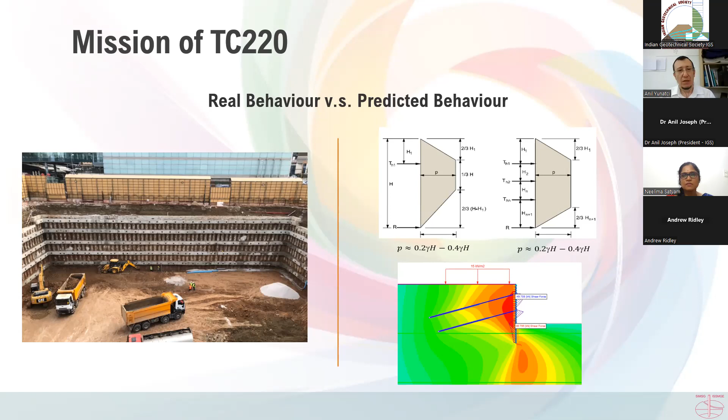The basic issue is that what we assume initially is not always reflecting what is happening in the field. Take the example of a deep excavation project and try to have an idea of the possible failure modes of an anchored pile wall. The real behavior versus predicted behavior, and the possible modes of failure, should be clearly foreseen and considered in your stability calculations during your conceptual design or finalized design.

However, we have a range of diverse uncertainties which arise from uncertainty due to mechanical characterization of materials. This may not be the correct expression, but I think it simply expresses its purpose. The uncertainty due to mechanical characterization may arise from spatial coverage, strength characterization, constitutive behavior, or any other type of both aleatory variability and epistemic uncertainty while characterizing the phenomenon.

There is also uncertainty and change in external and internal loads, such as pore pressures—you may consider pore pressures as internal or external depending on how you characterize and define them—as well as external loads. There are uncertainties due to the performance and mobilized capacities of man-made support elements. What we basically define in our good-looking finite element analysis in terms of the pre-stress value of a tendon may not always work out, or almost never works out, in the way we considered initially.

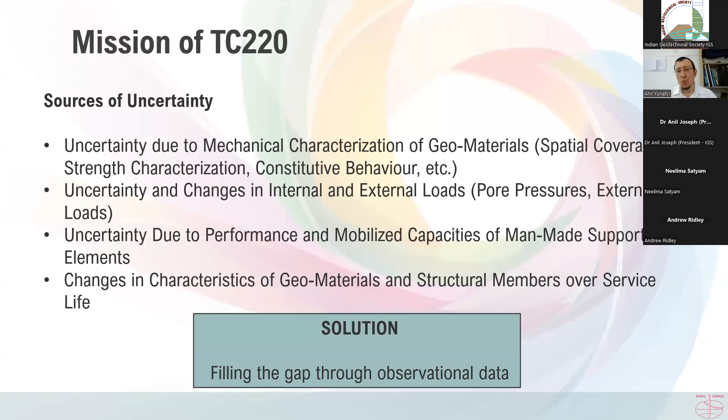There will be changes in characteristics of geomaterials and structural members over service life due to deterioration of the structural elements and their interaction with the natural materials, as well as long-term possible changes in the characteristics of the geomaterials themselves. So the solution will be to find an engineering way to fill the gap through observational data.

Continuing to the objectives, you may reach the committee through its dedicated website, through the ISSMGE main site—Andrew will spend more time discussing these, so I'll skip them quickly—or you may simply log on to field-monitoring.org to learn more and see how you can contribute.

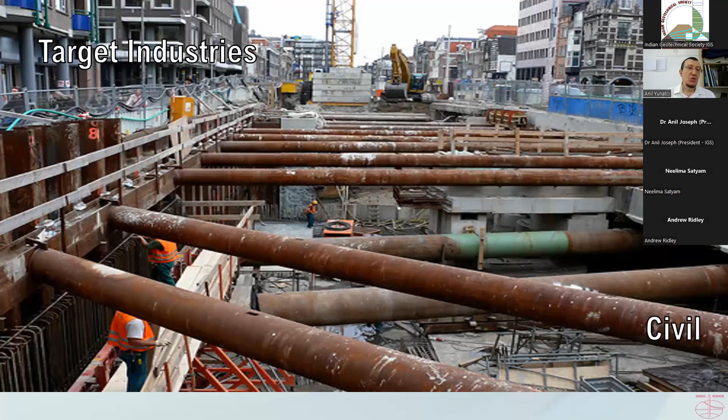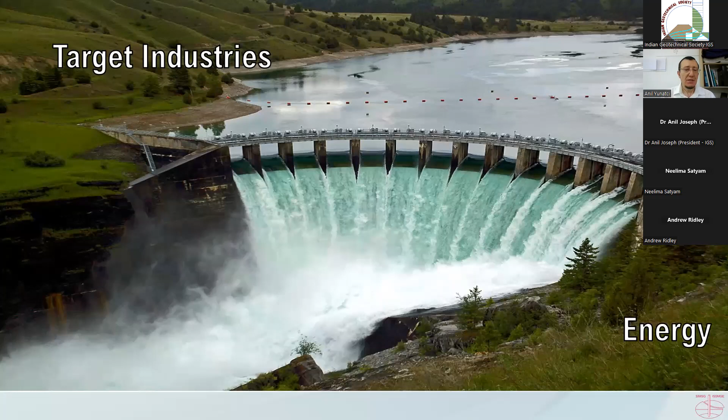We are trying to cover the civil industry, the mining industry, define or monitor geological hazards such as rockfalls and toppling failures, work in the energy sector and renewable sector, and keep an eye on existing infrastructure as well as newly built infrastructure, both across different time spans.

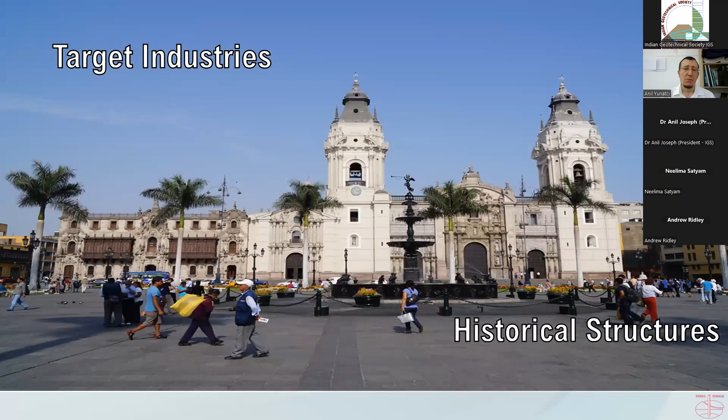What I mean by time span is that we may monitor a structure while it has been undergoing the first construction stage, or during its service life. This also applies to historical structures with a similar approach, industrial structures, and many others I may have skipped to emphasize here.

A very brief note on upcoming events and activities: instrumentation monitoring will be discussed in early October in Salzburg, Austria. There will be a specific session reserved for instrumentation monitoring at the ISRM Congress. The BGA, British Geotechnical Association, has announced a seminar, a half-day meeting at the Institution of Civil Engineers. Here you can note down the access link for more information.

Next year in Barcelona, and similarly at the 18th European Conference on Soil Mechanics and Geotechnical Engineering, taking place in Lisbon, Portugal, we'll be discussing more and having dedicated sessions on instrumentation and monitoring and how we can make it progress better. And last but not least, one other fixed event already mentioned: the largest dedicated event, the International Symposium on Field Monitoring in Geomechanics, will be held in India in 2026.

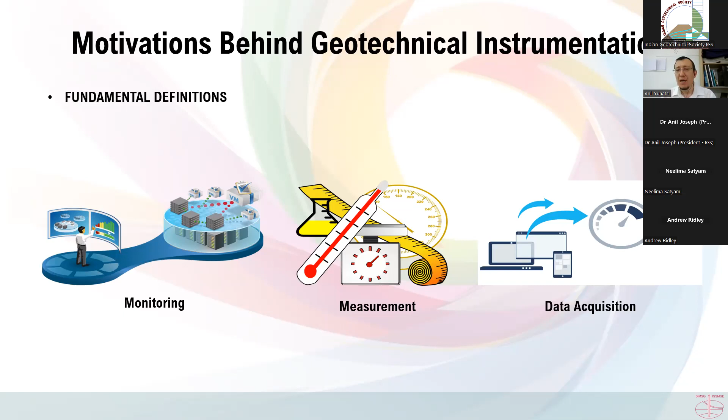And that's where the concept of monitoring comes in. Monitoring basically covers, in my sense, all the aspects of it, plus the data interpretation, and telling people in the most basic sense what is happening to my structure, what has happened to my structure, and what is likely to happen to my structure. The last question is not always easily answered.

The motivation behind geotechnical instrumentation is the performance assessment of new or existing geostructures. In the most basic sense, we need to define their potential failure modes. We need to verify if they are performing okay with regard to the assumptions we made before the construction stage. It's not only the sole structure we're trying to build or monitor, but there are adjacent structures or assets potentially affected by the behavior of our structure. So it's not just us - let's not be selfish in this sense, because any consequence will directly affect what happens to the nearby structure.

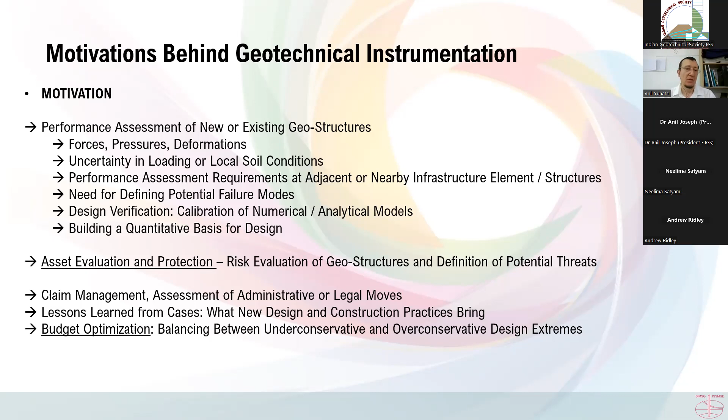So the motivation is to bring a working framework, which undoubtedly has to be customized specifically for each project we're involved in, to optimize the solutions for all parties involved, both in the technical sense, financial sense, and legal sense, due to its possible consequences. In terms of budget optimization, balancing between under-conservative and over-conservative design extremes is just one of the advantages of why you should monitor a structure.

Frequently encountered misinterpretations from our daily basic experience - we have heard directly from stakeholders that instrumentation is unnecessary, the structure is safe, instrumentation is expensive, it's hard to apply instrumentation programs, it's obstructing and decelerating my construction program, and data acquired from instrumentation programs cannot be used efficiently. These are all strictly and completely - I have to express it very freely - misinterpretations.

If you analyze the structure and the phenomenon in the correct way, and propose good, efficient solutions, then instrumentation will be essentially helpful in both monitoring the performance of your structure and preventing any legal obstructions or conflicts.

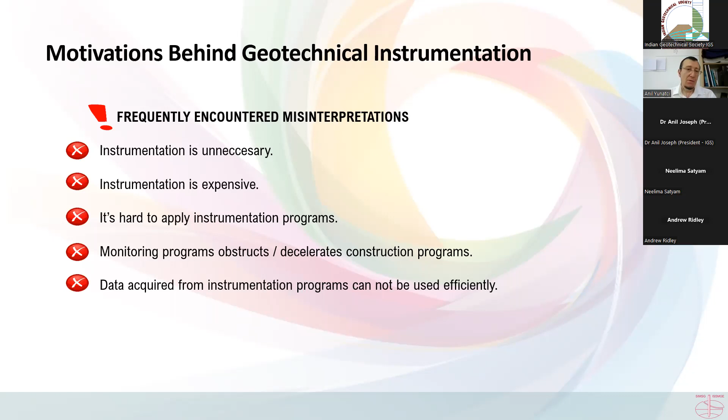I had a chance to go through my notes during the panel I attended about 3 or 3.5 months ago in Rome. It was the 9th of the series of the International Course for Geotechnical and Structural Monitoring. And these are not my words directly - these are jotted down words from the speakers of the panel, who are individually very experienced in their fields and have decades of experience, both in manufacturing instrumentation monitoring products, deploying them, managing large volume projects with a lot of instrumentation involved, and taking care of the financial side of it.

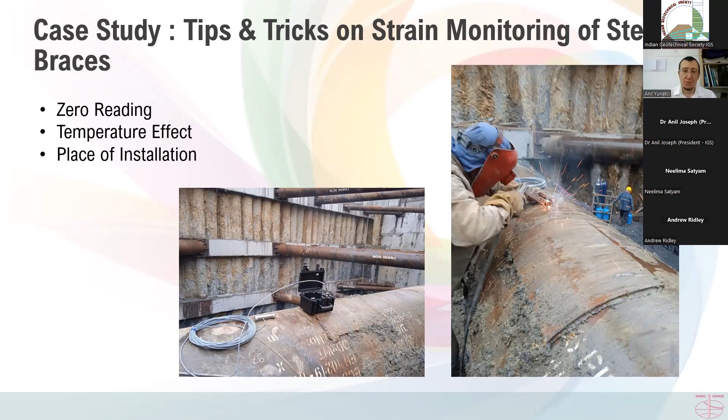Just speaking of the zero reading, you have several options. You can just install your strain gauges at rest state, where they are lying on the ground with no bending stresses and no lateral restraints. So if they are just properly supported uniformly and they will not be restrained at both ends, then what you have is a sort of zero reading over there.

So any strains on the zero reading will be just driven by the temperature changes, even if they are not restrained at both ends. So this is what happens when it's lying on the field waiting to be installed. And the second stage, now you just put it in the place where it should be. However, just do not make the connection.

So it's somehow without the connections and the restraint, operating in a way that it is not fixed yet. However, the members are in the effect of their own self-weights. So you will have a different zero reading over there. What you're comparing should not be pears and apples.

So be careful on when you're installing it and when you are reading your intermediate measurements. It will be very useful if you do both and try to compare, and that will help you explain what is happening in the field. Only the bending stresses are due to the self-weight of the structure. Here again, I'm not talking about any temperature changes. And I have not made any excavations yet. I have just placed the struts.

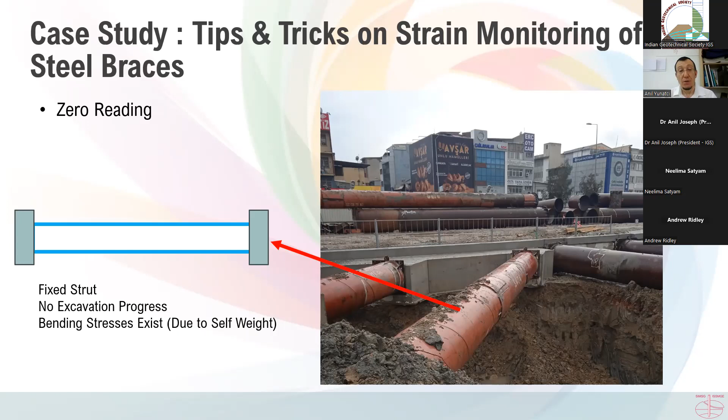Then I fix the ends of the struts, maybe include a load cell in between the reinforcement support and the elements, so that I can do a benchmarking by measuring the loads directly or try to infer the loads on the struts by directly measuring the strains. So this is what happens if they are put into temperature effects when they are fixed.

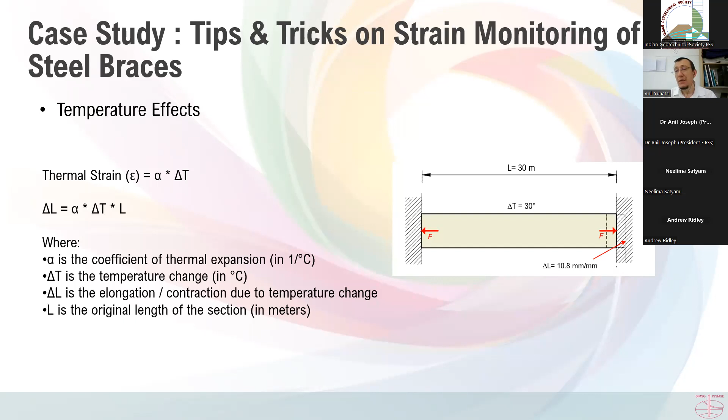So the equation is basic, and let's do an extreme calculation. It's a 30-meter long hypothetical element, as I've showed, and we are living in an extreme environment where the daytime temperatures are highly fluctuating and the change in temperature reaches up to 30 degrees Celsius. Let's see what happens hypothetically and how it is reflected into your readings.

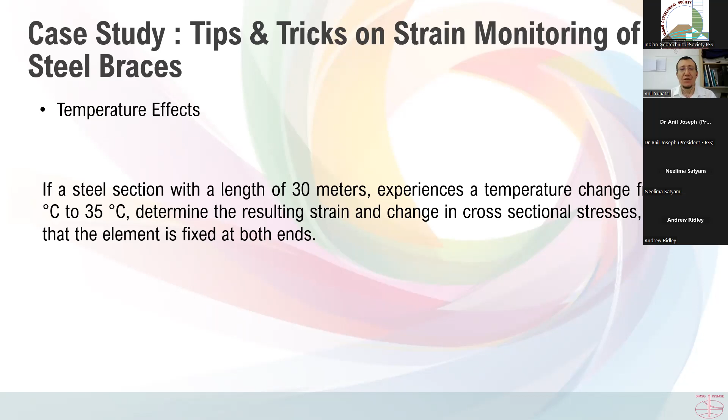So my scenario is the temperature changes from 5 degrees Celsius to 35 degrees Celsius. I have not made any progress in the excavation. Let's see what happens. There are forces induced and the stresses. We do the basic calculation, select the generic strut cross-section, and we are calculating that we are experiencing about 110 tons of thermally induced extra stresses on the structural members just due to temperature fluctuation.

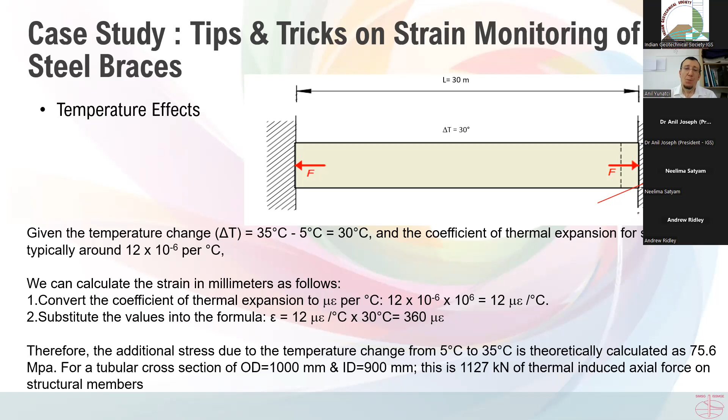We do not normally see this in our numerical analysis because we do not conduct numerical analysis on the basis of these temperature effects. A lot of case histories are showcased in the literature. One of them is taken from Osborne et al. 2023, that's access date. Here you can see that over a temperature change of almost 10 degrees, the strut loads on average in 3 different strut levels go from 1400 kilonewtons to 1800 kilonewtons.

So imagine that you are not taking continuous data from your strain gauge readings. Here locally, we don't do that. We recommend that. We do not always succeed in that. It's just some temporal readings taken at each excavation interval or weekly, which is mostly requested, and we object to this. And what happens if you don't carry on a proper practice of frequent sampling, also capturing the temperature change, is that you cannot differentiate any effects of load change due to temperature versus the excavation stages.

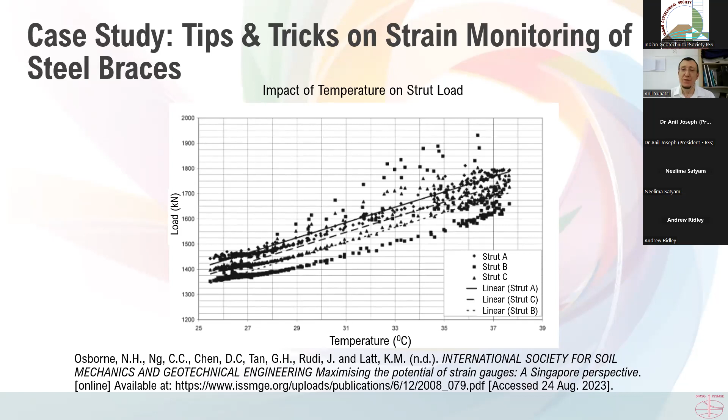You may have the sensor installed right, but if you haven't set up the monitoring program accordingly in the appropriate way, then what happens is that you miss those data and you are faced with questions that the strain gauges are working in an erroneous way and you are not measuring what you should be expecting.

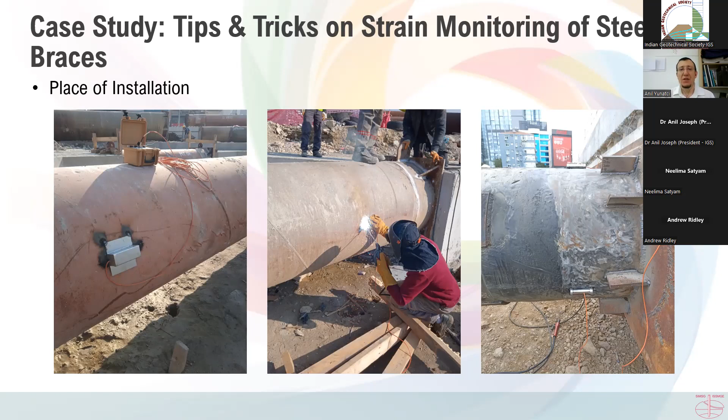So place of installation, whether directly along the supported sections or along the mid-span or the quarter span, is another discussion. As you all know, you may have some load or strain concentrations, non-uniform concentrations along these members. So keep an eye on where you are installing and the potential effects of installation.

The number of strain gauges fitted along each cross-section: if you use a double, hopefully if you place it in the up and down direction, then you will get the effect of the axial plus bending, because the bending will be due to the self-weight of the object and any changes onto that. If you are installing them facing each other along the hopefully neutral axis, then hopefully you will be experiencing only the axial effects.

If you use more, 3 or 4 strain gauges, then you have the luxury of eliminating any eccentricity related effects and see what is going on. So how you design the monitoring project and the details really matters, and the quality of the data you get. Of course, it increases the volume of the data to be processed. However, it gives you a very good knowledge at the end if you interpret it correctly.

Some of the time, we're faced with some difficulties as practitioners, like being faced with a bill of quantities in some procurement stages where not sufficient information is provided. I am sure that some of you are also experiencing those issues, and this can only be overcome by disseminating the knowledge and experience and bringing all people together in a common sense.

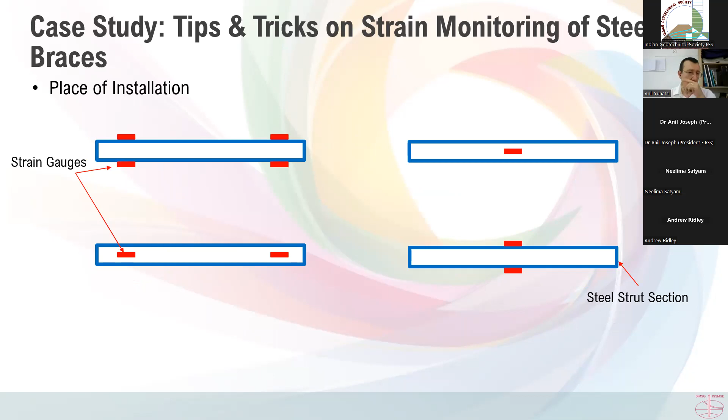So before installing the main foundation, which was very sensitive to settlements, we proposed to do a full-scale load test. So instrumentation and monitoring for the purpose of quality assurance and design verification, with the most basic set of equipment and methodologies with which we can provide some useful data to check our assumptions and numerical models.

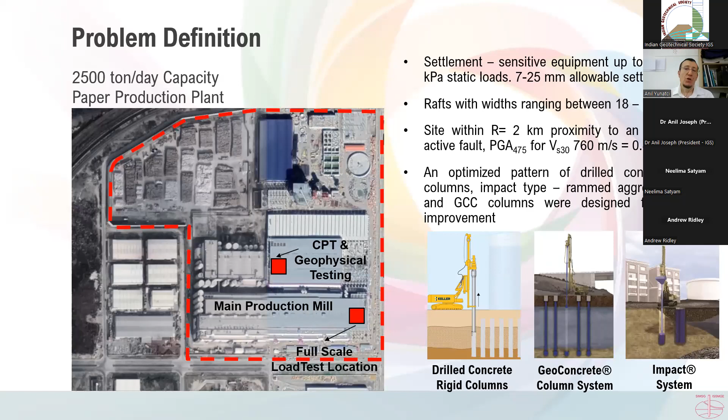The sensitive equipment was considered to carry loads ranging between 150 to 300 kilopascals, and the raft was ranging from 18 to 165 meters. So it's such a big plant. It was located in a very seismic area, and a combined pattern of drilled concrete rigid columns, impact type rammed aggregate piers, and GCC columns were designed for ground improvement. We did some CPT tests, some borehole logging, and tried to characterize the site.

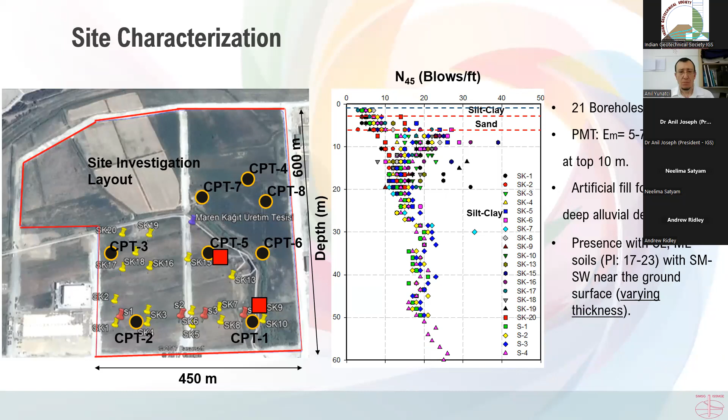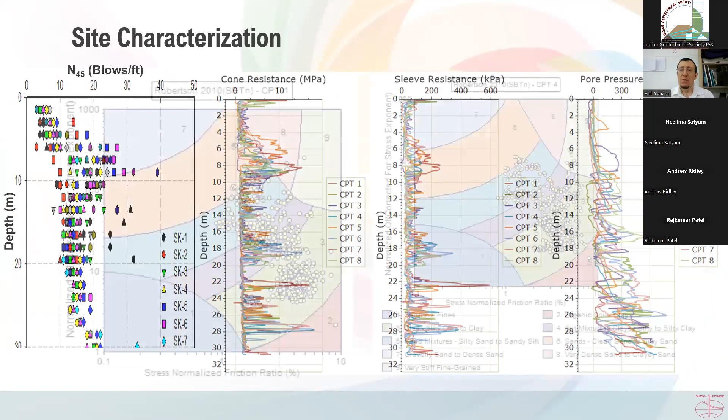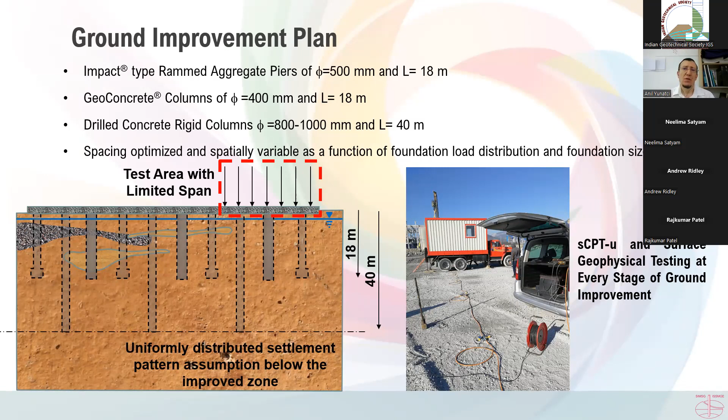I'm passing these quickly just to give you an indication that the site was properly characterized in any sense possible. And there was a very neatly planned series of instrumentation plus quality assurance during the intermediate stages of ground improvement. So after each stage, we still did some CPTs and seismic CPTs, as well as surface geophysical measurements, to see the effect of the ground improvement process on the realized values before making a full-scale load test.

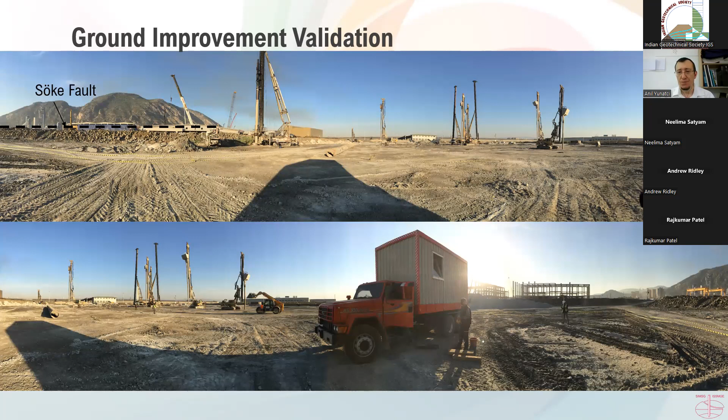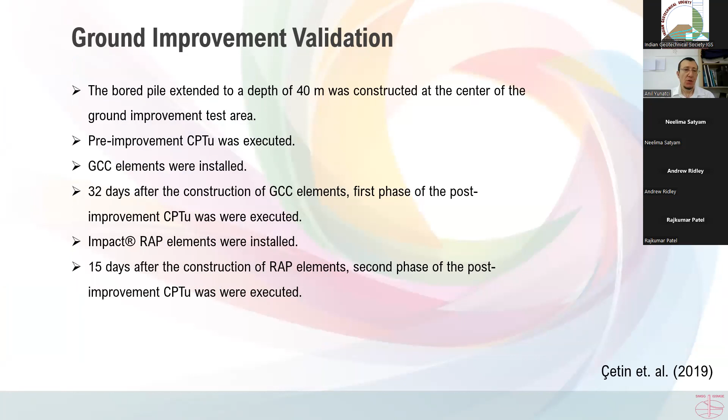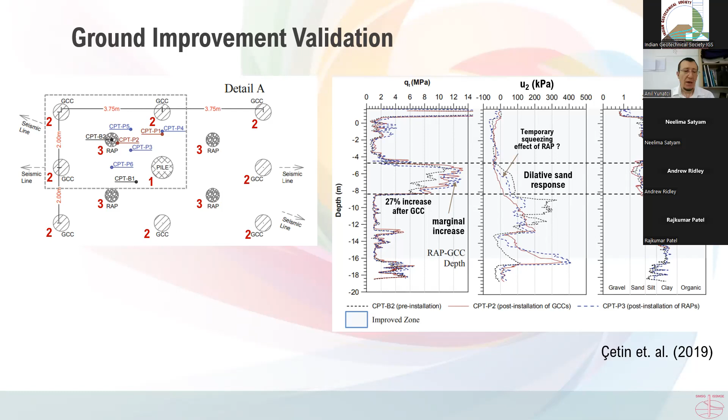A few glimpses from the field, from the nearby fault located 2 kilometers away, which is capable of generating large magnitude earthquakes, and the construction site. Surface geophysical measurements. A sequence plan of the instrumentation during the successive stages of ground improvement. Then we came up with a series of recommendations and verification through instrumental data on whether the desired performance was achieved. We did not stop there.

We were aware that the actual loading was to take place on a very large area. So by ignoring the size effects up to a certain extent, we decided to make a full-scale loading on a limited area. The design load was selected as 191 kilopascals, and dead loads were applied over 3 by 3 meters. So we applied concrete blocks as dead loads reaching up to 170 tons.

And we set up an instrumentation system to see if there were any consolidation settlements, which means whether the ground improvement stages were completed successfully, whether the elastic settlements were the only source of settlements we would encounter, and whether they were within the tolerable limits for the performance of the structure.

So the site was monitored remotely, in real time, by a very simple set of instruments through a real-time monitoring system. And we saw that the system worked seamlessly for a period of 1 month, and 90% of the total settlement was completed within 36 hours of completion of the design basis load. So it was almost all elastic settlements. This was validated.

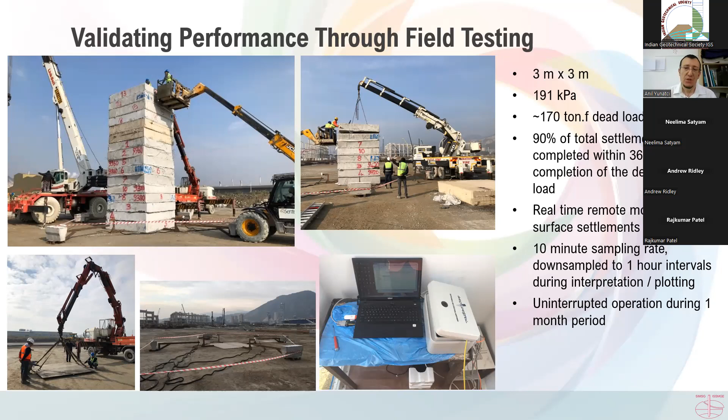Then the amount of settlements were used to back calculate this very simplified numerical model of the foundation to be resided there. Then we updated our estimations of the subgrade moduli, both in the static sense and the dynamic sense, because there was going to be working dynamic machinery, vibrating machinery inside an industrial site, to come up with updated estimations of some geotechnical parameters, which were then handed to the design engineer for conducting an iterative approach on the foundation performance assessment.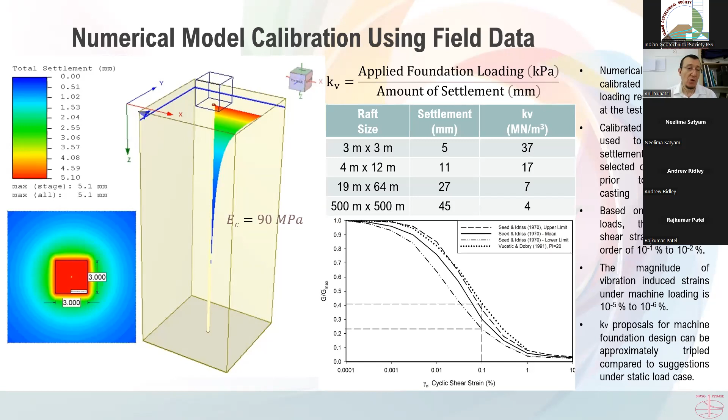So the thing is, as simple as it gets, we had a chance to play with multiple parameters, but this was one of the most simple cases we had. For some other problems, we have multiple parameters which are sensitive to the output, and they are nonlinearly related to each other, which means that we have countless options to back calibrate our numerical models. So it's somehow becoming an art to back calibrate a model using field observational data, and it has always been like this.

So the lessons learned from case study 2: detailed site characterization during preliminary design phase, direct assessment of design inputs for machine foundation design were put into action. And we considered that we made a small contribution to overall risk management during the lifetime of the facility due to geotechnical performance related issues, because the next stage for the investor was to decide, along with the third-party investors, of course, the insurance rates for the industrial site. That's where instrumentation monitoring was mainly put into action.

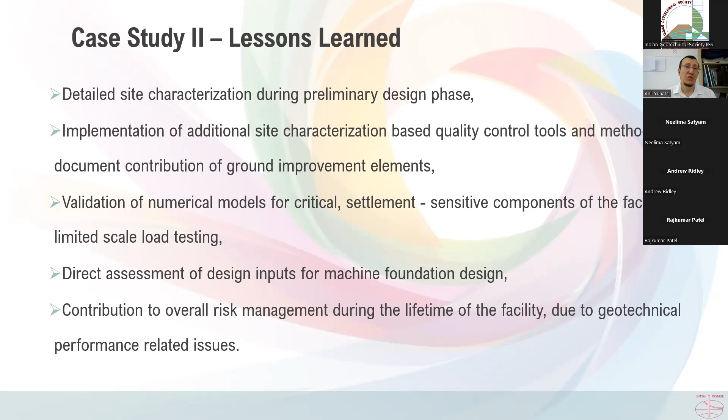So moving on to case study 3, don't worry, we don't have much. We're about to wrap up. So it's about long-term monitoring of a site undergoing slope displacements, and another 3B case, which is about test fill monitoring. My comments and conclusions will be similar. That's why I intentionally selected to include these cases under one case study.

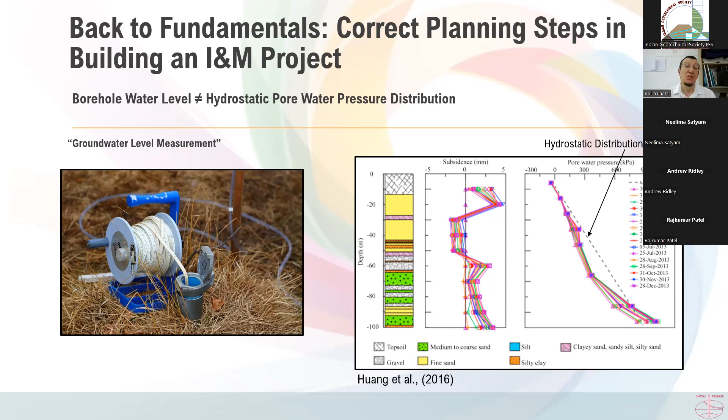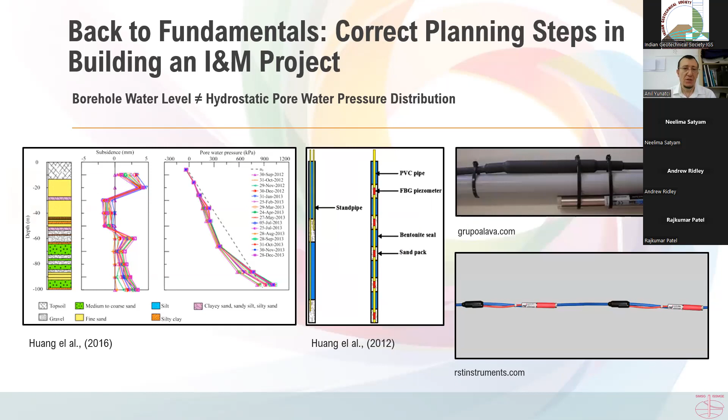So just a quick reminder, as almost all of you are experts here: for groundwater level measurements, we have to define what we are measuring. Borehole water level is not always equivalent to hydrostatic pore water pressure distribution. That's why during the rest of the presentation we're talking not about borehole water levels in general, but the piezometric levels. Numerous ways and technologies and tools to measure them. Multiple tools, vibrating wire instruments, fully grouted installation methods, Casagrande standpipe piezometers installed at different elevations. So I'm not concentrating on the tools we have, but the output and the essence of the story.

One parenthesis to be opened here. I really like this reference and work and like to refer to it in any case I can. I know that this is a big project and I have just quoted the reference. If you're interested, you may have a further read here.

The astonishing thing for me here is that, since this is an urban excavation where any adverse consequence would affect all stakeholders nearby, the project owner had to begin its instrumentation program 1 year before the excavation began, to have an idea of the fluctuation of the piezometric levels nearby, have an estimation of how the pore pressures would be distributed behind their excavation, and update their numerical modeling efforts

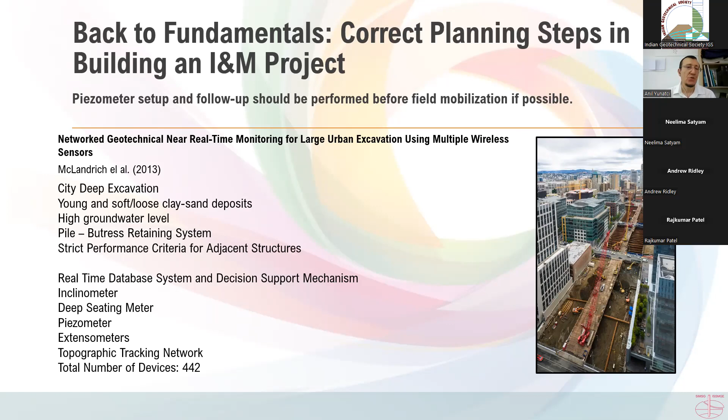in a similar sense. This would also provide them invaluable data in terms of capturing the fluctuation of that parameter within a year due to seasonal changes or rainfalls, so that they would have the luxury of differentiating how much of the fluctuation experienced during the construction stage was due to the construction process itself and how much of it is due to the nature of the groundwater characteristics. So I'm skipping and closing the parentheses.

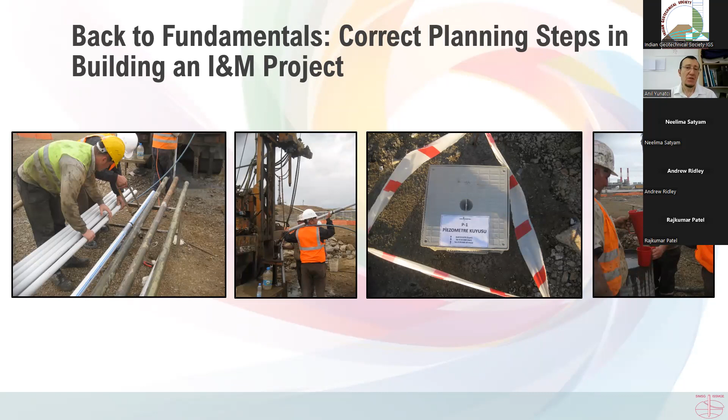You will have very valuable information on how vibrating wire piezometers, fully grouted ones, should be installed in the field. So a little bit of field experience from our side.

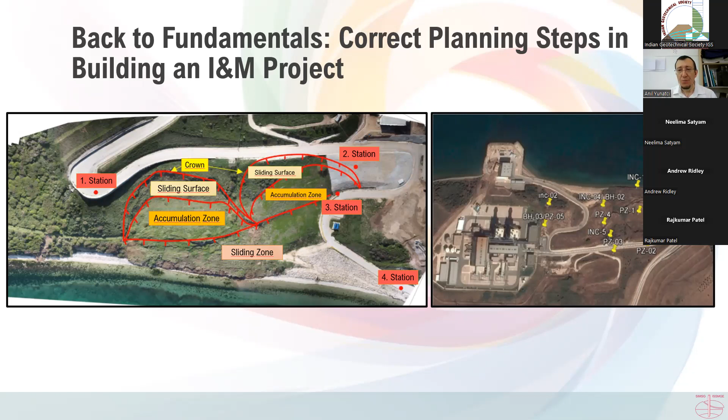And back to our case 3A, a failed slope site, again in an energy plant site where we were invited to monitor. The plan was set up and we had an array of portable inclinometers, steady inclinometer readings, and multi-level piezometric readings. One thing I like: we're still monitoring this site and it's still working over 7 or 8 years.

We lost some of the inclinometer boreholes along the way, quicker than I thought, at different elevations. Good thing is we know where the deflection has occurred. The bad thing is we did not have any in-place inclinometers to realize the progress of the rate of deformation during the time that it was not monitored and the readings were not taken.

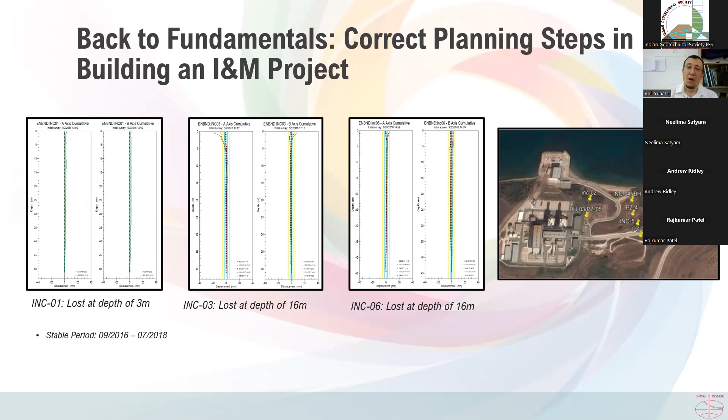We only had a chance to go over there a couple of times a year, and if anything happened in between that time, we lost it. And we saw the consequence with clogged and lost inclinometer casings. Still, this gives us some data. Our regret: we could have done better in capturing higher quality data and understanding what has happened better.

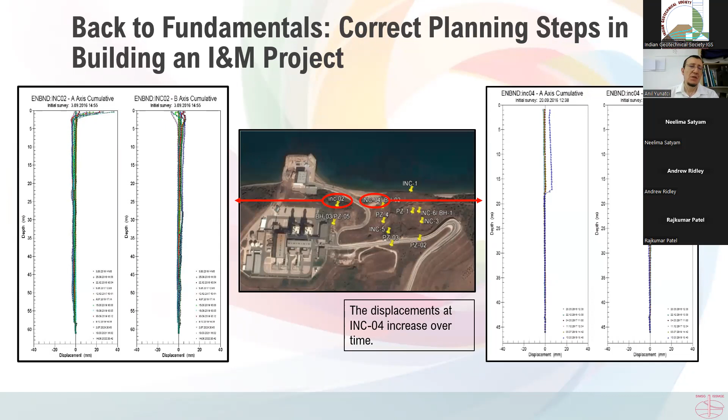So the behavior is relatively different at different parts of the site. At some boreholes, we have some clear deformations reaching up to 20 meters over 45, 50 meters of boreholes in total. Meanwhile, the same problem was also evident in the piezometric measurements. What piezometric measurements actually deserve is continuous reading and logging.

Our bad chance is that we did not have the luxury of monitoring them at a steady pace, but we only had a chance to monitor them once in a while. And this is practically giving us not much information about why the deformations are being triggered, or if they are closely related with the changes in pore water pressures, because the displacements are cumulative, and once they're there, if you go 2 months later, you're able to measure it.

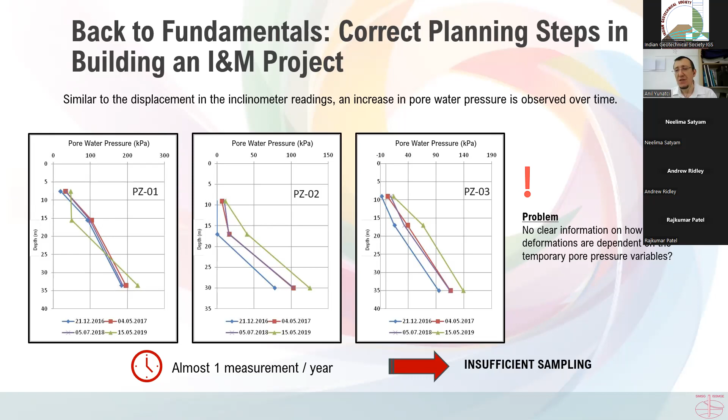Pore pressures are not. They're dynamic, they can dissipate, and once you miss it, you don't have the chance to build some good knowledge out of what you are getting. So the essence of the story is, if the monitoring program was put in the correct way, starting from scratch and procurement, and we had a chance to persuade people that this was essential, it would have been a better consequence and provided more insightful data for all of us. So another lesson learned.

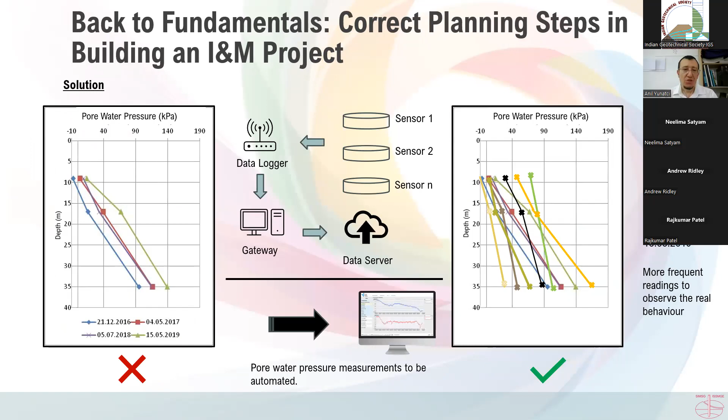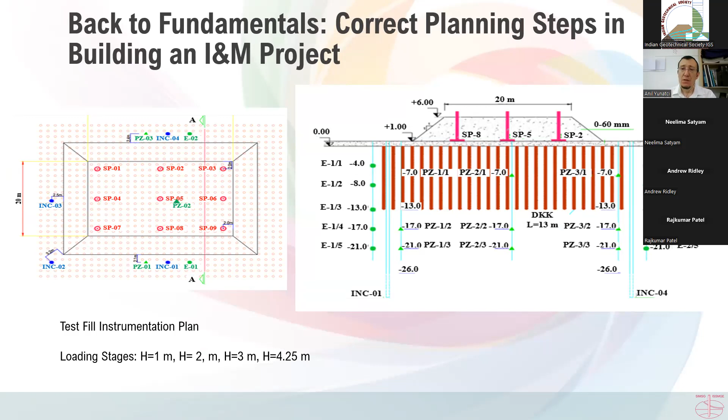I'm skipping all these. Just a recommendation on how it should be in the most basic sense. Same problem, another case, a test fill site, a ground improvement site where we have an array of multi-point extensometers, settlement plates, inclinometers, piezometers, and try to monitor the performance of a completed ground improvement at a port location.

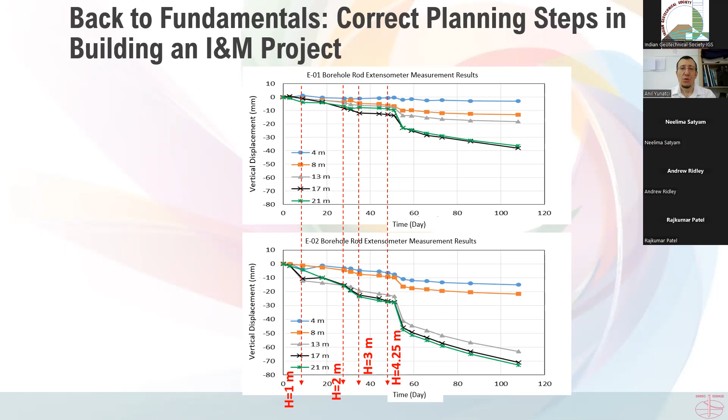So I'm simply showing the results of the multi-point rod extensometers. The fill was placed in stages, and between those stages, some measurements were also done. And after the maximum height was reached, again, we had a chance to monitor it for a while, to see that the fill-induced settlements would be diminished until a certain point and would dissipate. And this is what happened with our piezometer measurements.

Some of the piezometers were located at depths where the ground was improved, and that section was supposed to be undergoing only elastic displacements. And some of the piezometers were located at elevations where some minor consolidation-induced settlements were expected.

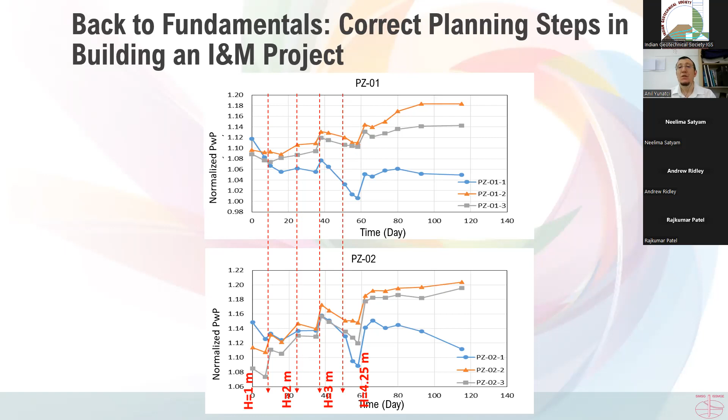The same thing, our regret is that we could have obtained more valuable data here by getting continuous, maybe hourly or bi-hourly data from the piezometers, and that would be very efficient in terms of bridging the gap between the design assumptions and what's been observed in the field.

Okay, a lot of discussions going on for the ground anchor loads, for the prestressing levels, not for the experts in this field. However, as we've told and shared, there's a great necessity, a demand for disseminating our knowledge to the engineering community and the public and the investors, that we are the interpreters. We should be playing the role as interpreters and bridging the gap between explaining what is happening in the field and what is the assumption in the design stage.

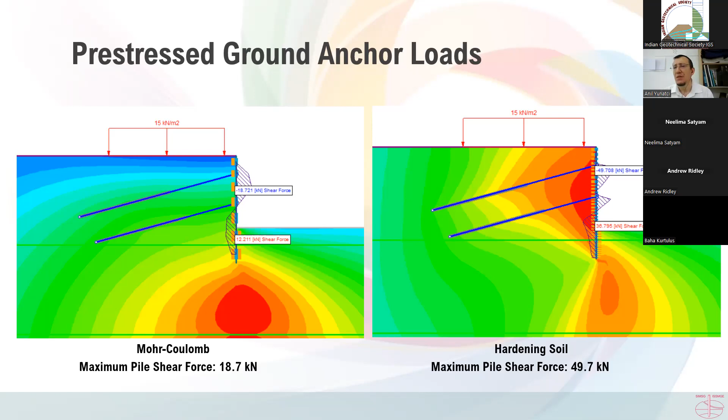And one ideal world that we have reflected over here a moment ago is we're applying some sort of a prestressing load over the anchors and assuming that they are the same for that stage. Of course, they're expected to change with respect to the progressing excavation. What happens in reality is that they are not. Even though they are placed in the correct way, depending on your gripping system or the details of the manufacturer, this value is surely fluctuating, and it is highly changeable at different parts of the world.

You may have different experiences. You may be experiencing different levels of uncertainty or post-locking lock-off load losses than me. But in this part of the world, I am openly demonstrating to you that we are experiencing at some projects a reduction of up to 30% compared to design loads.

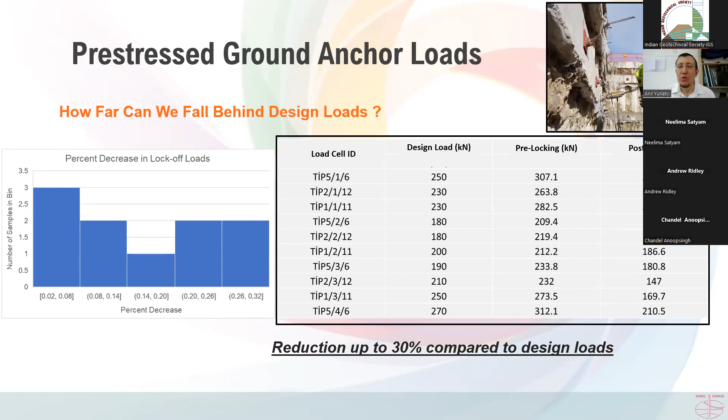So on the left, you see a histogram of the percent decrease of the losses in our small sample set. It varies from 0 to 30% in an almost uniform manner. So what happens if I carry that little piece of information back to my numerical model? Before doing so, another parenthesis from us. I am disregarding the improper ways of installation. I am totally assuming that the devices are being installed properly.

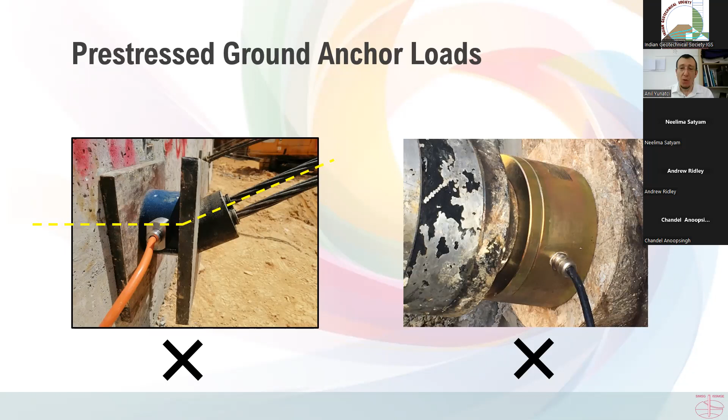By the way, these two pictures are real, and we are trying to correct the practice so that every instrument is installed and used in the proper way. What happens if you don't?

Still in my parentheses, and thank you for your patience. I'm exceeding my time a little bit, but I'm about to wrap up.

Load bearing plates on both sides of an anchor load cell, no matter what type of anchor load cell you're using, are essential. In load cells with a fully filled cross section, the stresses are distributed relatively more homogeneously. However, you still have that problem up to a certain extent, and you can solve it with proper use of instruments. In anchor load cells with hollow cross sections, it is more difficult to homogenize the distribution of the surface affected by the stress.

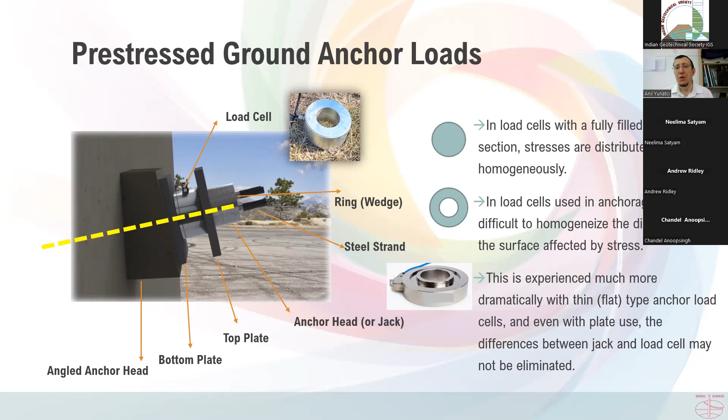If you have a different load cell with a different geometry, you need a different configuration of supporting bearing plates to homogenize the strain and make sure that the loads are measured in the right way. What if you don't? What if you do the wrong thing, or just close your eyes to any documentation provided, and by mistake, here's what you will do.

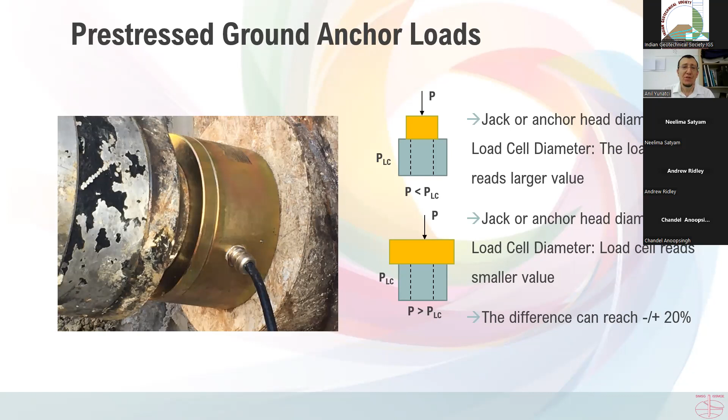If you are trying to concentrate loads using caps having different dimensions compared to the dimensions of your load cell, you may have readings of larger or smaller value once you get rid of the hydraulic jack and you're left alone with the load cell only. And that difference can reach up to 20% and maybe even more.

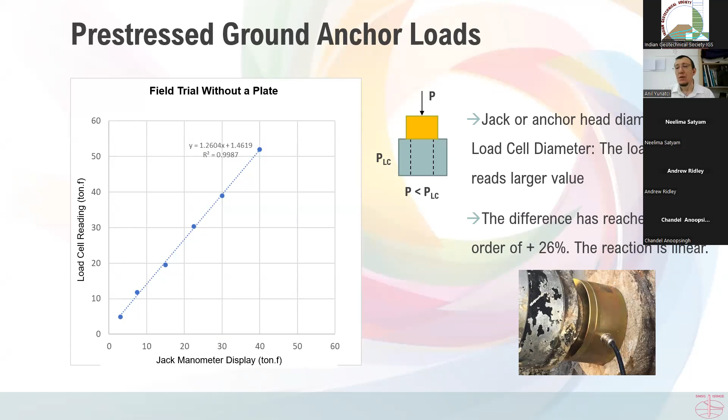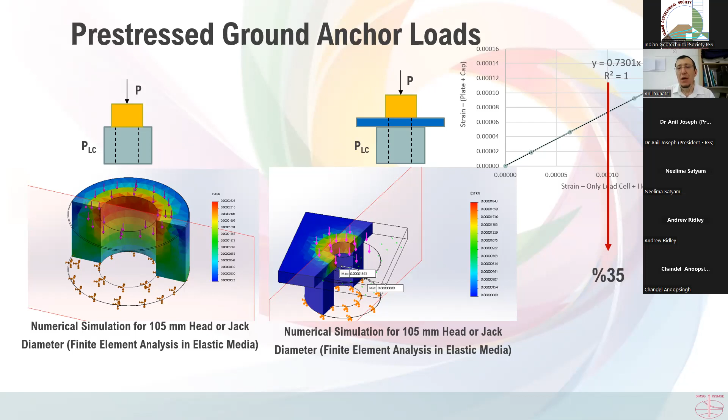Then we verified this example using elastic finite element solutions to showcase what happens if you use, in the proper sense, a load-bearing plate of sufficient thickness and geometry. The numerical analysis shows that you can have up to 35% of difference, and a more properly homogeneous strain distribution along the load cell itself, so that it will measure a better value, as it should.

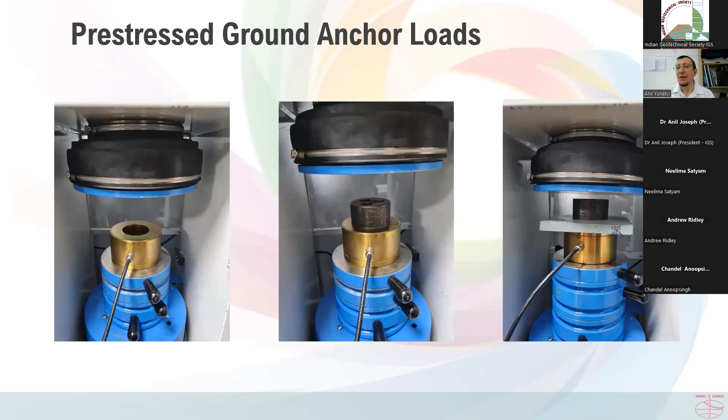We tried to replicate what is happening and do the correct thing in the lab environment. Again, here's our deviated value when we do the incorrect installation in our lab environment. And if we correct it, now we're getting the same value as we should in the field. So 22% of deviation recorded at our labs, and the field finding was 26%.

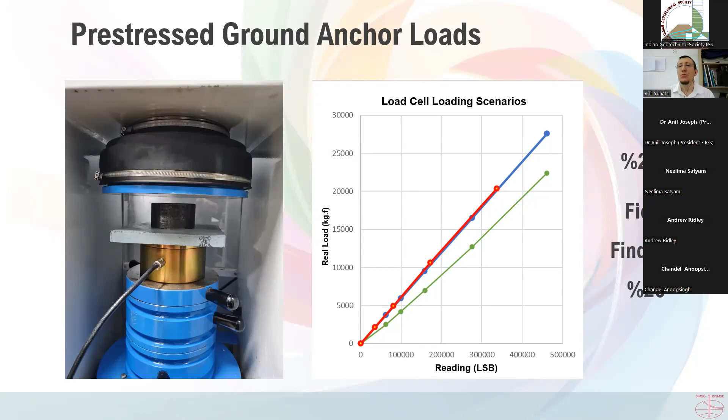So this is not something new, and this is not rocket science. I'm just trying to demonstrate the proper use of instrumentation products in the field. It's not always the selection of the correct instrument, but how you install it, how you use it, and how you interpret it. Closing my parentheses, back to my anchor loads and my beautiful, colorful numerical model. Let's see what happens here.

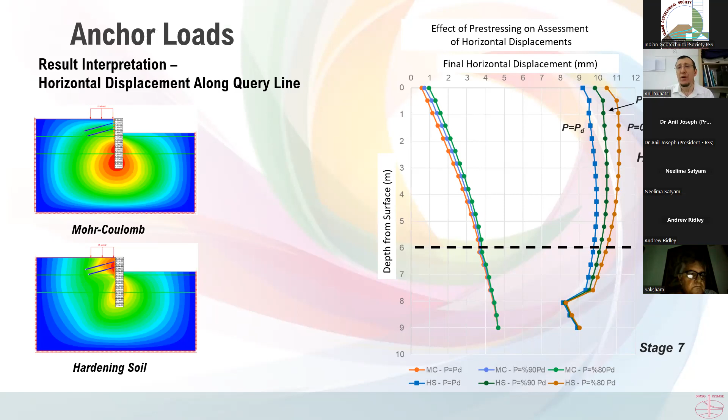If I have a 10% and 20% reduction in my lock-off loads in my anchor cells, what happens to my displacements? You see, the sensitivity differs with respect to the soil model, the material model that you're using, and you can play around with other variables as well. It's a completely nonlinear process. If you do poor meshing, then you are more sensitive.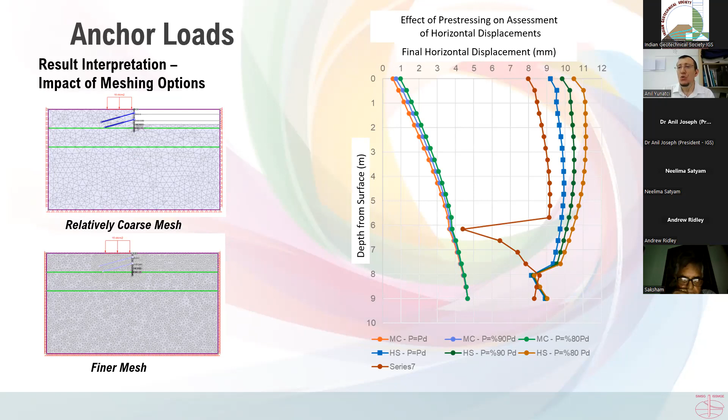What I have to say here is, if you have field observation data, make sure that you are comparing it with a neatly tailored numerical model as much as possible, so that you will do the calibration process in a proper way.

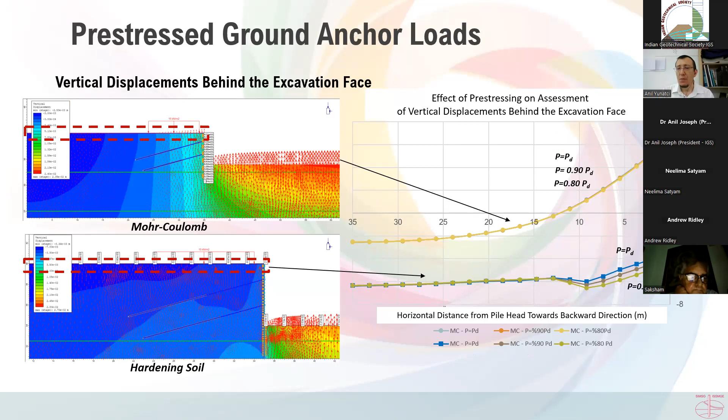Same for the displacements, which are expected behind the wall. A little bit of sensitivity studies based on the real observational data. And my last words here at this phase will be the change in lock-off loads, if you reflect these findings back to your numerical model and rerun the model.

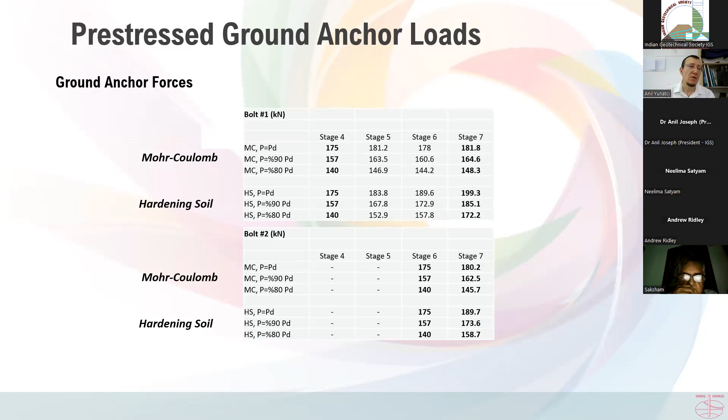So my last case study makes use of observational data through multiple sources. So far I have just emphasized sensor-based solutions, but we were faced with a very tough problem, one that continued for almost a quarter century along a critical site. So they have lots of good quality data.

Due to confidentiality reasons, I don't have a chance to just reflect or provide more information. But what I can say at this point is that we had a chance to work with GPS data, topographical data, some satellite-based data, as well as soil moisture sensor data, meteorological data, in conjunction with a set of piezometers, inclinometers, and associated instruments for monitoring the risk to a mine facility due to the sliding of a huge mass.

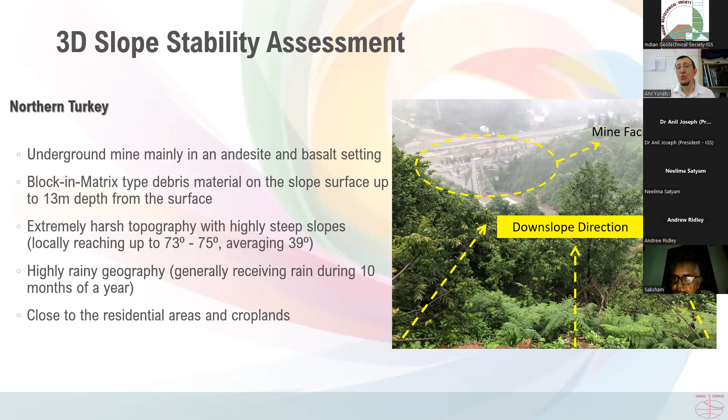What we inferred here, thanks to the information gathered from the instruments and being on site, came from iteratively digging through every piece of information collected over time. Of course we had to eliminate some of them, and that was based on judgment, and yet no machine can do it. So geotechnical engineers following us here, you can be proud of yourselves.

The thing is, it's a complicated mechanism consisting of deep, very deep seated slides, along with not so deep seated slides, but still reaching up to 18 meters. However, if you look at the data, there are multiple failures induced by different mechanisms and progressing in different directions. So you have shallow slides due to seasonal rainfalls, mostly controlled by morphological features as well as rainfall changes, and you have a deeper slide.

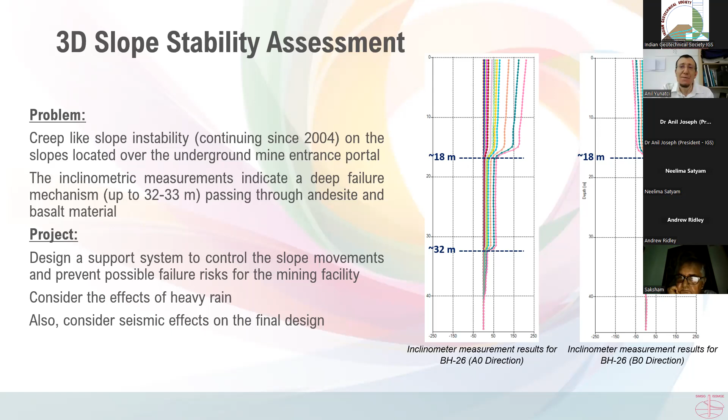So you can have both solutions. You will have to bring a solution to the dominant problem, and you will have to understand or just leave the smaller problems to their own fate.

We use all of this information to come up with a calibrated model, both in 3D and 2D in our analysis, and proposed a two-row, gigantic solution for slope remediation, just to slow down the progress of the moving mass.

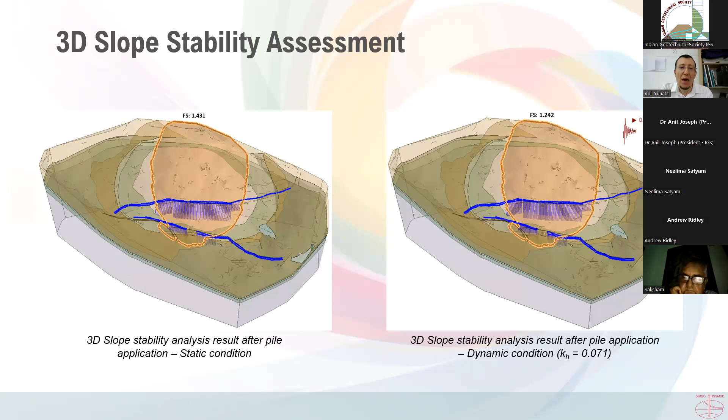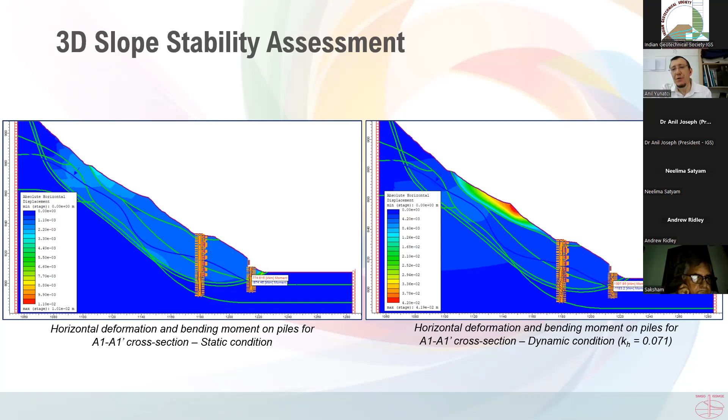We always just combine all of this data, available data, instrumentation data, to calibrate our models, to verify or refine our failure surfaces in our cross sections, and progress.

So, vision for the current and future industry needs. I'm fully aware that most of you are more experienced than me, so let me just put out a few words and then conclude and leave the word to you.

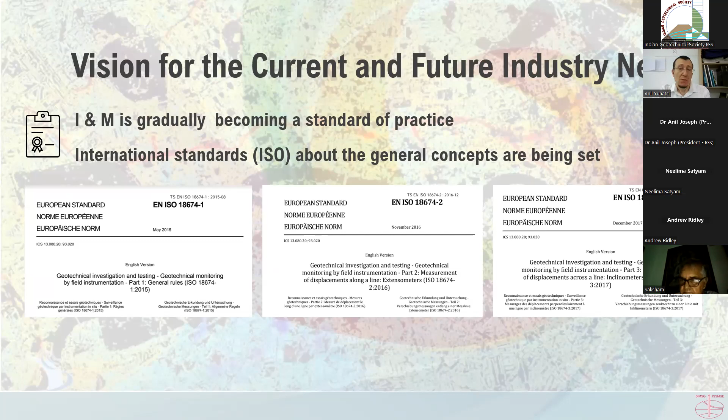Instrumentation and monitoring is gradually becoming a standard of practice, maybe more rapidly than we consider. International standards about the general concepts are being set thanks to these efforts. Sensors are gradually becoming more affordable, however still not budget friendly. However, they are not a big concern compared with the value they bring to the solution and the problem definitions. Coupled use of contact-based sensor data and remote sensing has become inevitable.

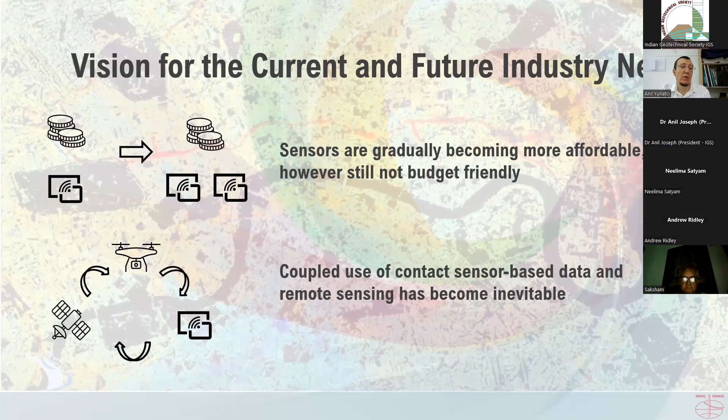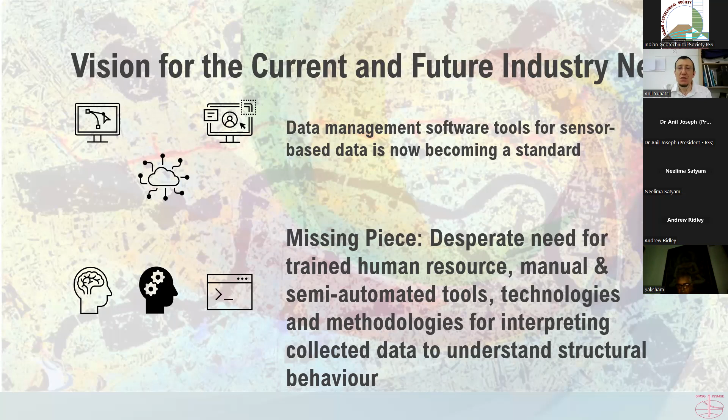Now we are just entering a new era where we can collect all of this data together and process it accordingly. Data management software tools for sensor-based data is now becoming a standard, or has already become a standard in my point of view. The most critical missing piece is the desperate need for trained human resources, manual and semi-automated tools, technologies, and methodologies for interpreting collected data to understand structural behavior. And that's perhaps one of the largest objectives and missions of the TC220 committee, and everyone is welcome to contribute further.

As a wise man and a smart engineer said, it's all on the screen, so I will remain silent for the rest of the day. Thank you very much.